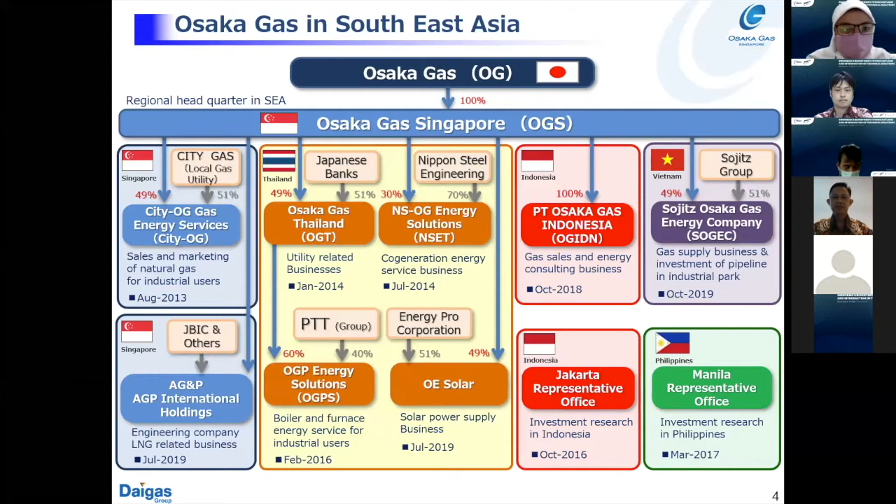This is our organization structure in Southeast Asia. Osaka Gas Group's downstream business has been expanded through leveraging its expertise accumulated in the Japanese market, energy service and engineering business using natural gas based on its own energy conservation technology to reduce CO2 emission and contribute to regional development here. So, Osaka Gas Singapore was established as a regional headquarters for the region in 2013.

And under Osaka Gas Singapore, now we have 8 subsidiaries in 4 countries: Singapore, Thailand, Indonesia, and Vietnam. Also, we have a representative office in Indonesia and the Philippines. Basically, we are collaborating with significant players in each country. For example, we have the JV with City Gas in Singapore and the JV with PTT in Thailand for gas retail and energy service respectively. In Indonesia, PT Osaka Gas Indonesia is collaborating with Pertamina Group since 2018. In Vietnam, we are supplying gas in industrial parks with Sojitz, which is a Japanese major trading company.

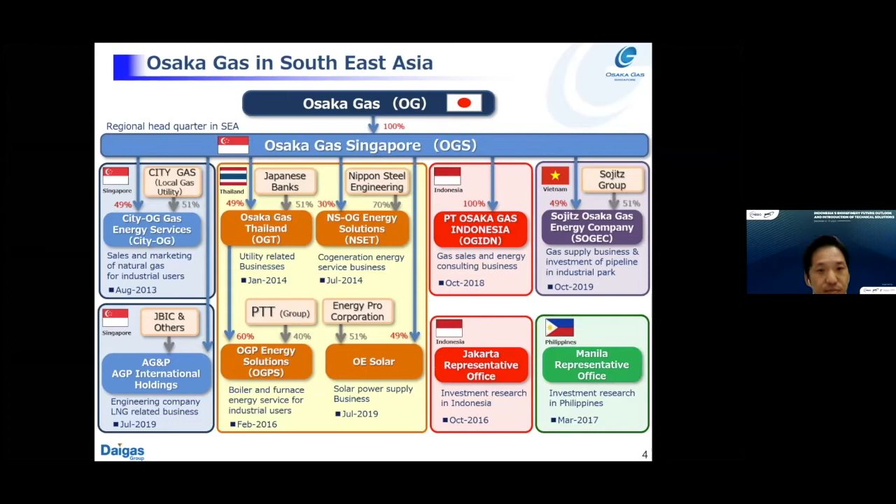And recently, we focus on renewable energy in Southeast Asia. So we established OE Solar in Thailand to conduct solar power business. These are our energy consulting lineup in downstream business. Our wide range of capabilities related to energy are cultivated by our activities in Japan for over 100 years. We have rich experience regarding energy supply, such as liquefied natural gas, LNG, and compressed natural gas, CNG, and so on. And we also have engineering know-how or technology about gas equipment, including boilers, burners, furnaces, and gas cogeneration systems, which are highly efficient in producing heat and electricity by utilizing the exhaust heat of the system.

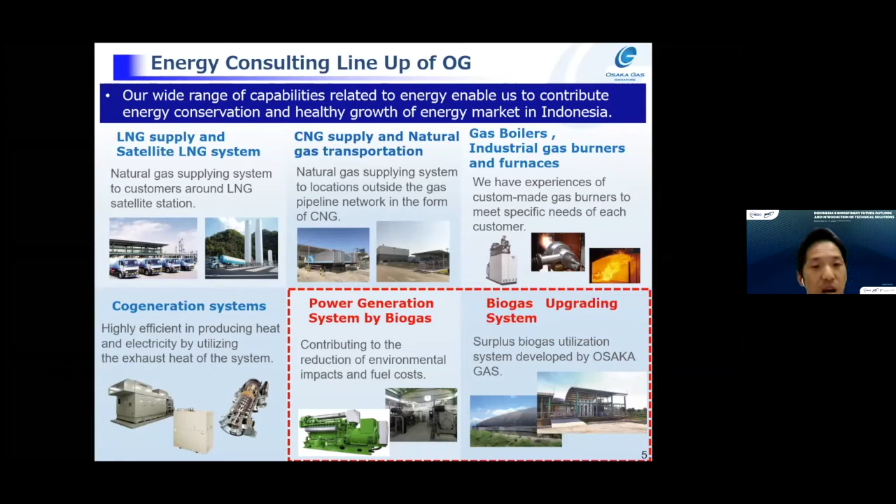Our strengths related to the biogas utilization technology, which I am going to talk about this time, are also an important factor to save energy and reduce CO2 emissions. These capabilities enable us to contribute to energy conservation and healthy growth of the Indonesian energy market, I think. Moving on to the next part of my presentation, I'd like to explain our technology background of biogas upgrading.

Biogas is generated from various raw materials, such as organic waste, sewage, and landfill. I think everyone here knows well, biogas from organic waste consists of about 60% CH4, methane, and 40% CO2, and some small impurities such as H2S. Conventionally, biogas is often released to the atmosphere or burned at the place where it is generated. Even if it is used after removal of minor components, it is used as heat or electricity at the place where it is generated.

However, by upgrading it, it becomes biomethane and can be used for various purposes, therefore expanding the possibilities. For example, by compressing upgraded gas into CBG, compressed biogas, it is possible to sell it as CNG to industries and natural gas vehicles. The upgraded gas can also be used as pipeline gas by injecting it into a gas pipeline. As a gas company, injecting biogas into the gas pipeline is an important factor in supporting the spread of renewable energy in the gas business. And we believe that biogas is one of the best renewable energies for a gas company because we can use the existing infrastructure and engineering capability of natural gas.

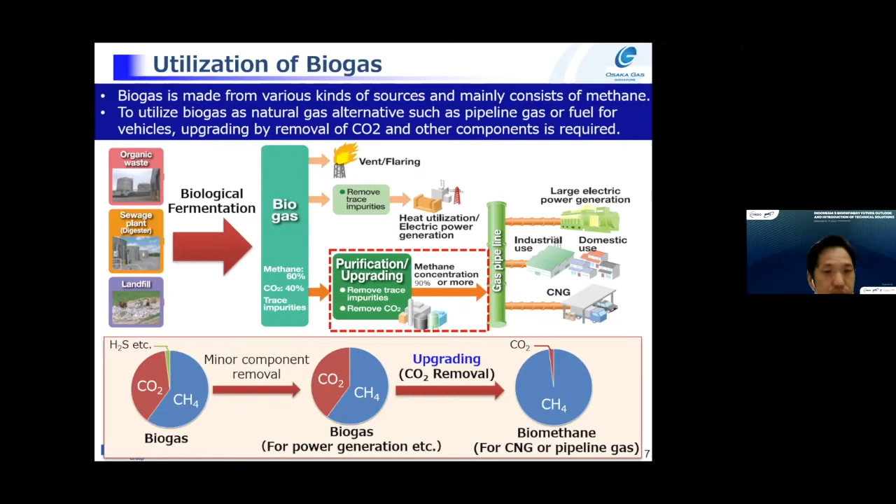Basically, PSA plays a role of making highly purified biomethane, and the separation membrane contributes to realizing a higher methane recovery rate by off-gas recycling. This hybrid system has achieved the world's highest level of methane recovery efficiency of 99% or more, and lower biomethane production cost. In addition, our technology was granted 3 patents.

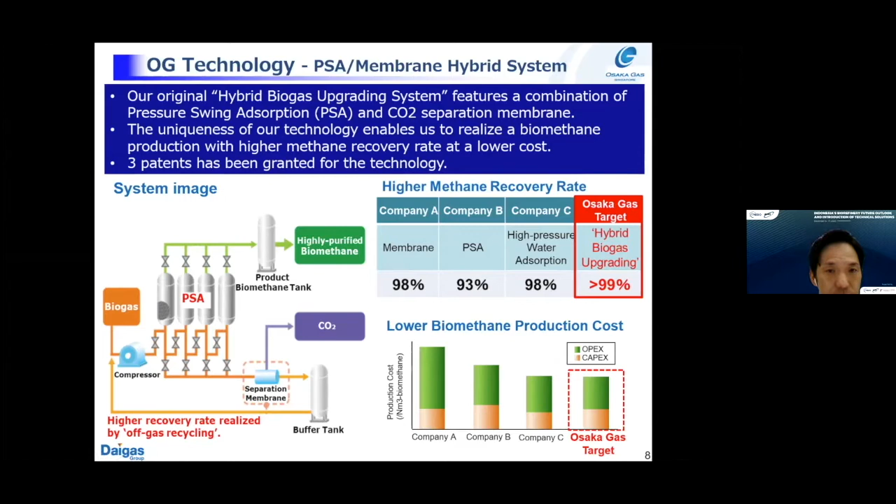I'd like to explain more detail about each technology of the hybrid biogas upgrading system. On the left side, in PSA, CO2 is adsorbed on adsorbent, such as carbon molecular sieves, supplied by our group. PSA has 2 processes, adsorption and desorption. At the adsorption process, only CO2 is captured from the biogas on the adsorbent at pressured condition, so CO2 is removed and high purity CH4 is recovered.

At the desorption process, the captured CO2 is released at low pressure condition and discharged as off gas. But as some CH4 remains in the gaps in the adsorbent, this CH4 is also discharged and cannot be recovered. So the CH4 recovery rate is not so high.

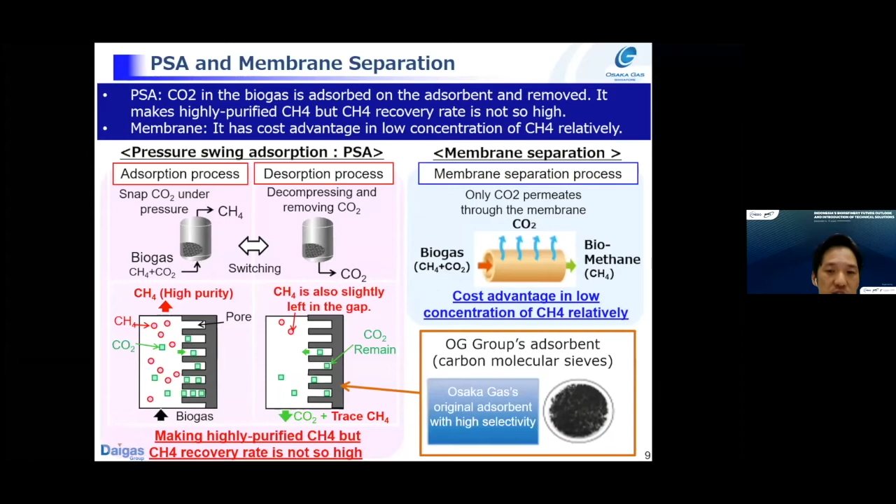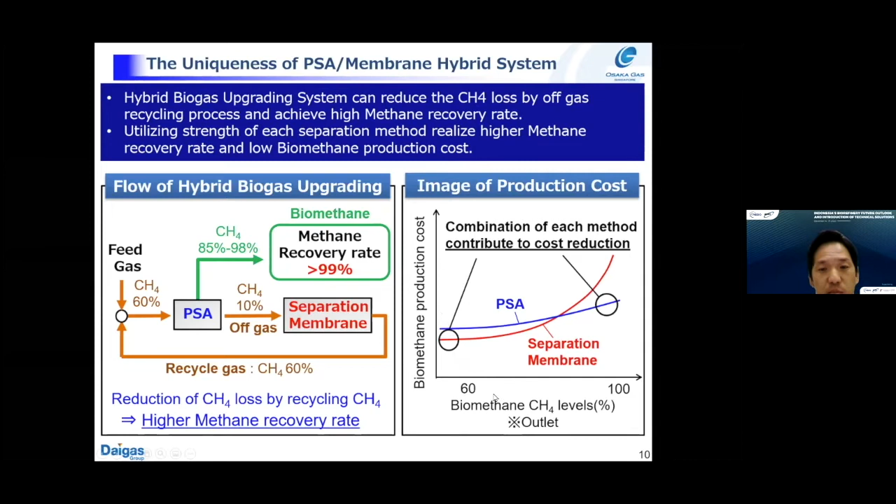The company was actively pursuing the effective use of energy derived from its palm oil mill effluent, called POME, through initiatives such as selling biogas-generated electricity to local power companies. So biogas from POME was already used at this site. Generated electricity was sold through the grid, but due to restriction on grid capacity, not all generated biogas could be consumed. The project was started with a policy of purifying surplus biogas and using it as compressed biogas (CBG) for natural gas vehicles.

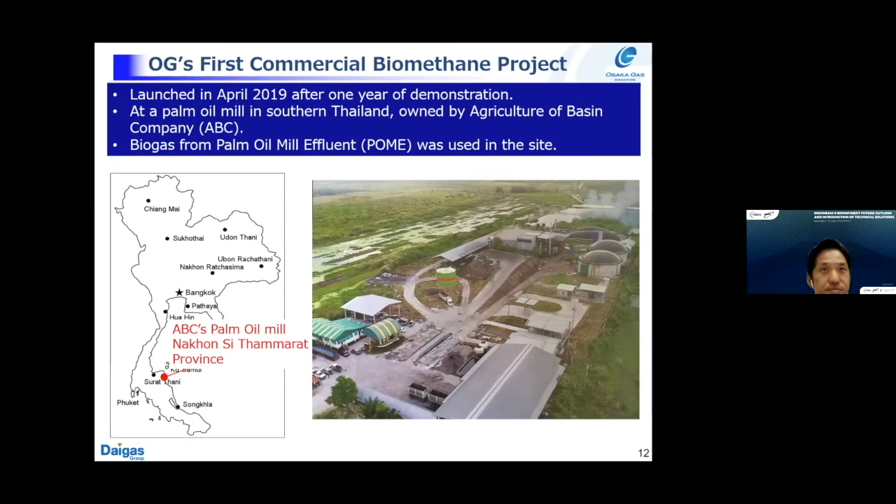ABC uses upgraded biomethane gas as fuel for its own trucks and third-party natural gas vehicles. So the energy station was newly constructed by ABC. 160 cubic meters of biomethane is sent to this station and processed into compressed biogas to be utilized as vehicle fuel for NGV. This is an overview.

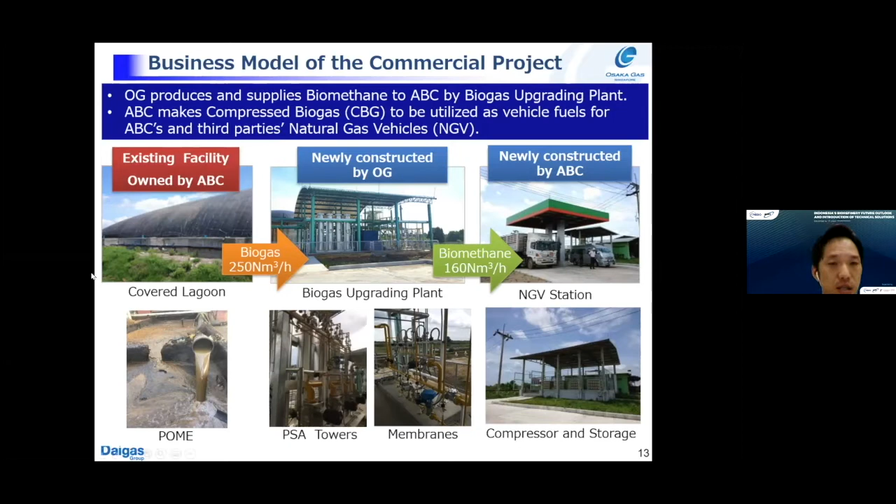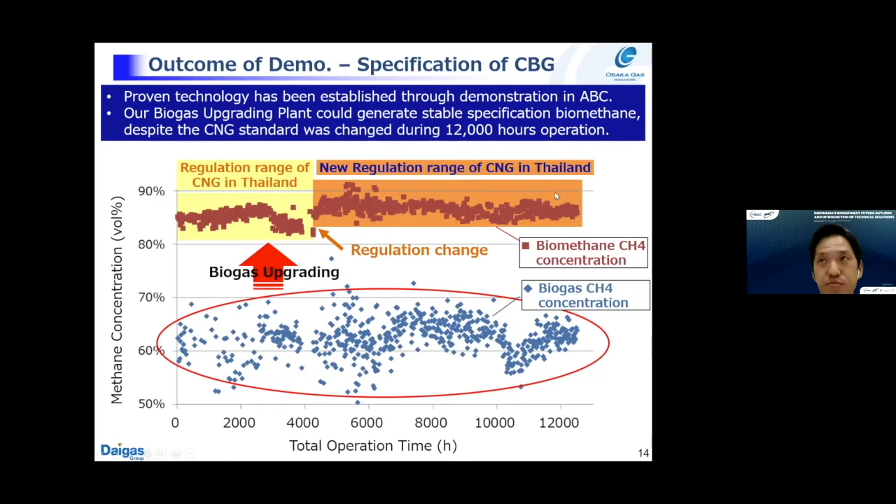Osaka Gas tested to operate a 250 cubic meter per hour biogas refining facility that assumes a commercial deployment. The project focused on verification of long-time based stable operation and a method to minimize the cost of producing methane gas, as well as determine the effectiveness of the methane produced as a vehicle fuel.

Based on the outcome of pilot testing, ABC actively continues developing initiatives to effectively utilize the biogas generated at a factory as a fuel for natural gas vehicles.

Biogas is used at 1 million cubic meters per year, which reduces CO2 emissions by about 1,180 tons per year. The project produced about 95,000 USD per year profit by selling CBG for NGV. We have done the demonstration in ABC successfully, and now we are in the commercial phase.

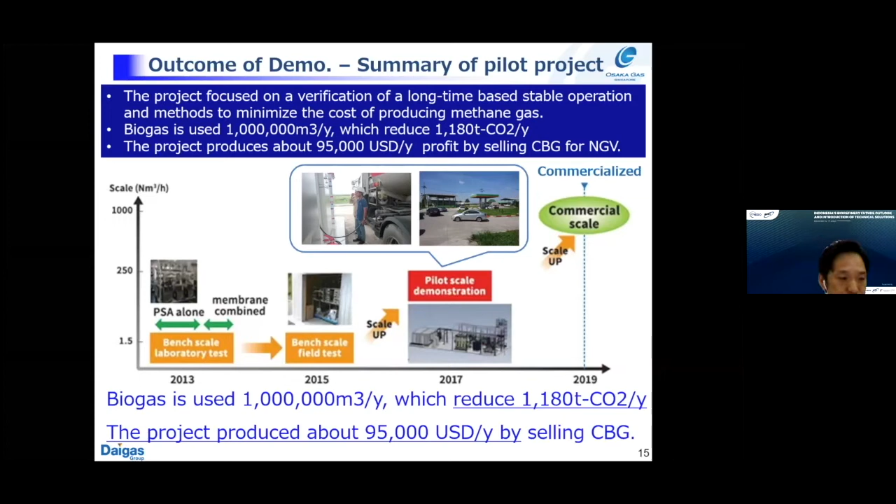Moving on to the next part of my presentation, I'd like to introduce you to our business in Indonesia. We have established PT Osaka Gas Indonesia in 2018 as our business entity in Indonesia.

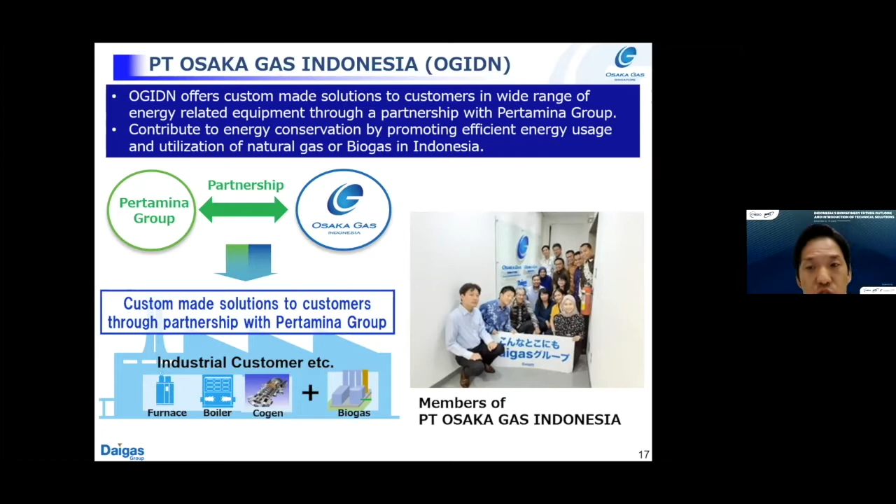With a strong and growing partnership with Pertamina Group, the company offers a custom-made solution to customers for an optimized energy supply and consumption in the country. Our mission is to contribute to energy conservation and environmental footprint reduction in Indonesia by promoting efficient energy usage through utilization of natural gas or biogas in Indonesia.

We manage everything from designing, engineering, and until maintenance of the facility. And such facility is owned by us. Therefore, what the customer needs to do is simply pay a monthly fee to Osaka Gas, which corresponds to energy usage of every month.

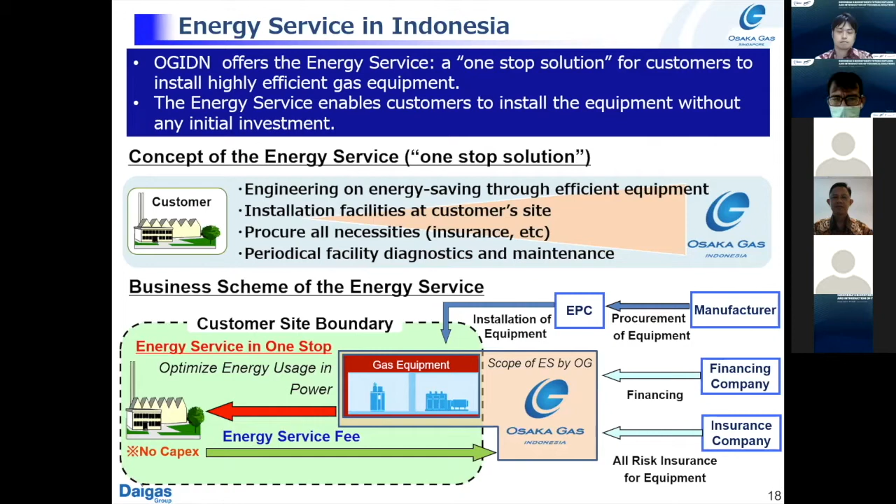In this example, customers supply POME or livestock waste to their biogas facilities, including digester, and receive upgraded biomethane cheaply from our one-stop biogas service. Customers have several options of utilizing biomethane, such as self-consumption, selling to other factories, and injecting into a gas pipeline.

However, I think it is difficult for the Indonesian gas market to inject biogas into a gas pipeline so far, but injection into a gas pipeline will lead to more efficient utilization of biogas.

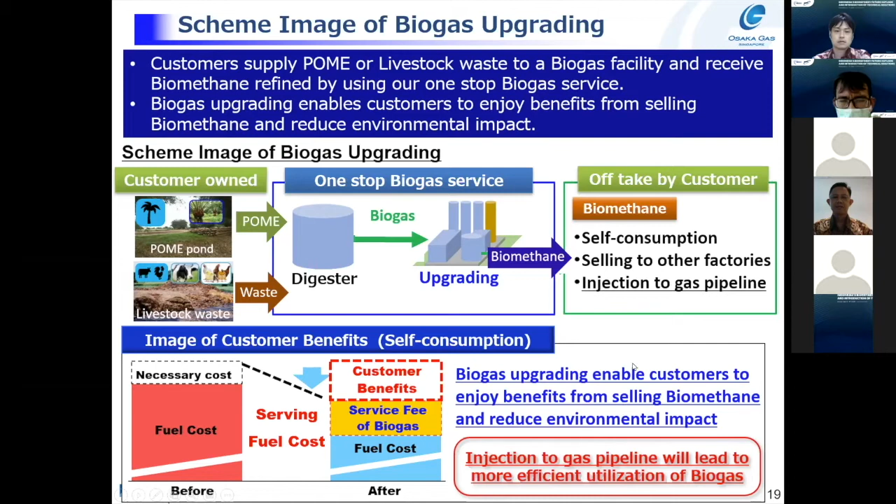Before it is injected into a gas pipeline, biogas needs to be adjusted to the purification level and calorific value equivalent to that of city gas. After such treatment, biogas can be injected into a gas pipeline and supplied to general consumers.

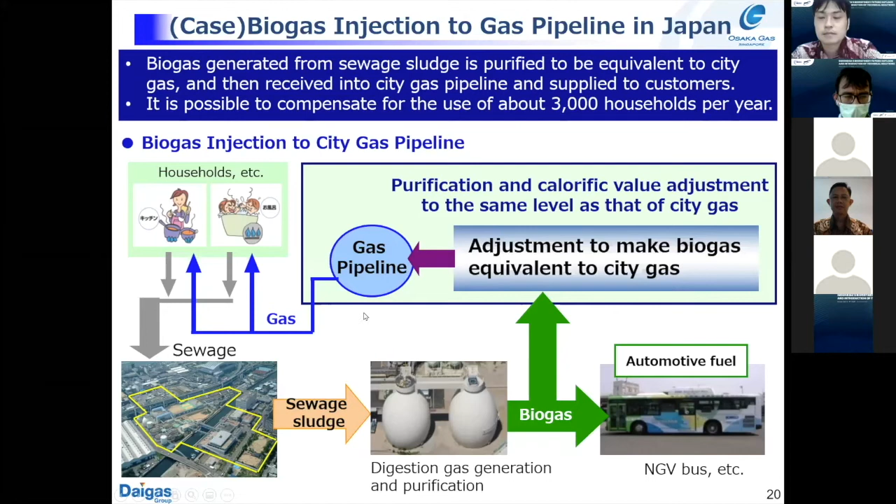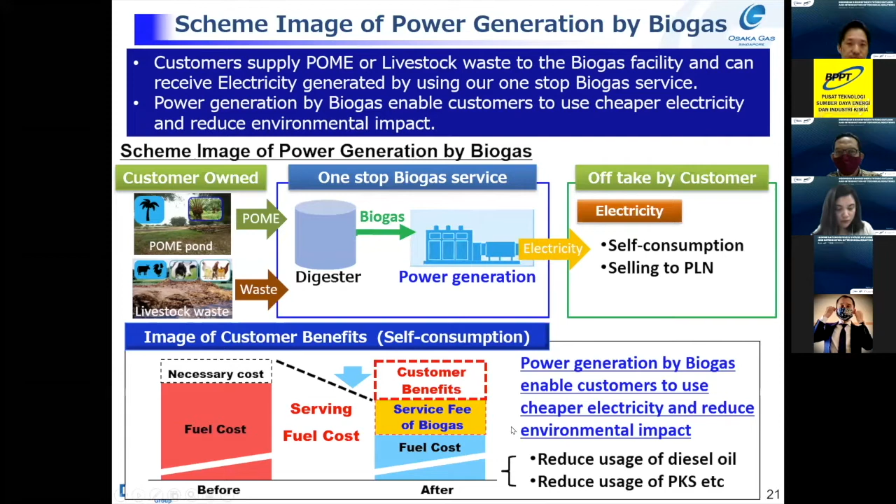In conclusion, I'd like to say that our technology and solution can maximize your benefit and profit in your business. If you are interested in our technology or proposal regarding energy, please contact us individually. Thank you for your attention.

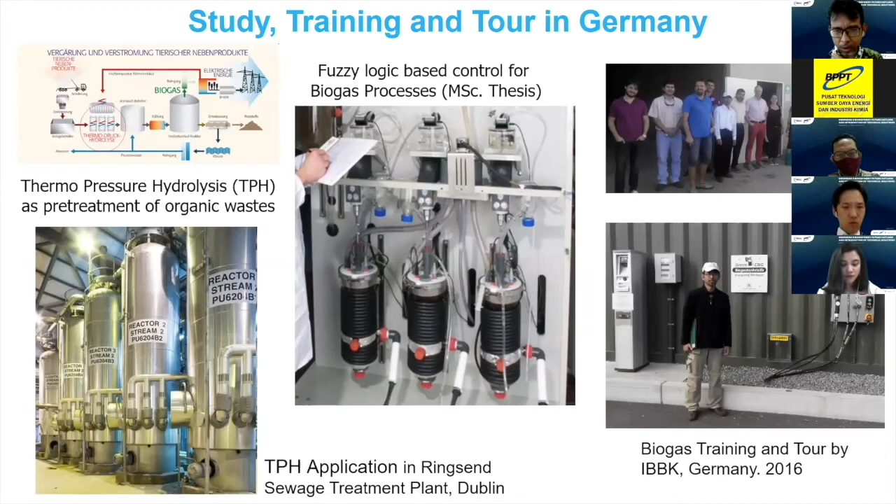I've studied in Germany, diploma and master thesis about biogas technology from organic waste, and I've also joined training and tour in 2016. I am active also in Asia Pacific Biogas Alliance, mostly from Malaysia, Thailand, Philippines, Indonesia, and also from some other countries like, for example, China and Vietnam.

That is our activity. I'm chairman of Indonesian Biogas Association. We have done a lot of activities, meeting with, for example, EuroCham business group, European business group in Indonesia, where we discussed the opportunity and what we can do to push more the biogas technology implementation in Indonesia. We also do many seminars and business forums. For example, last year we did a seminar on business prospect of biogas technology in Indonesia, and also a business forum on biogas upgrading and bio-CNG application.

This year, January 2020, before lockdown, we also did a lot of lobbying and helped the government draft new regulation on renewable energy, together with other renewable energy associations. That is our association. We would like to do technology transfer, capacity building, research and innovation, and we help the government in policy and regulation, networking, matchmaking, fundraising, and so on.

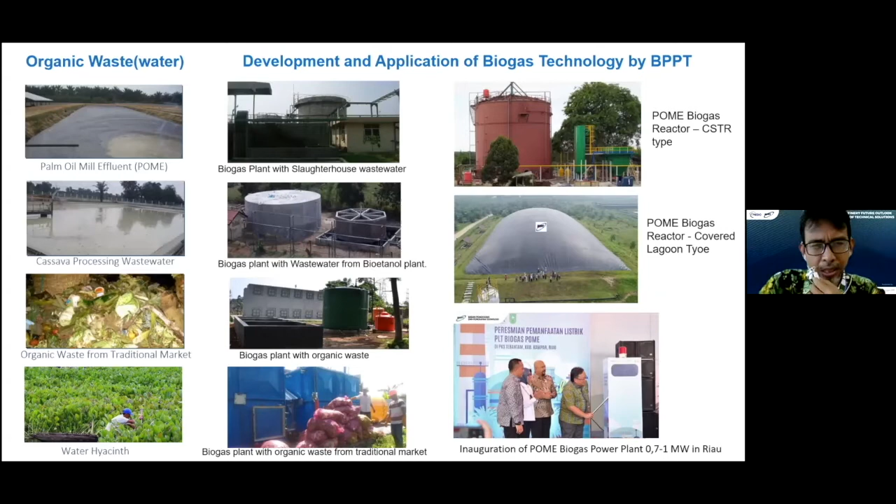As introduction, I would like to show you part of BPPT's activities and experience portfolio in biogas plants, which I was also involved in. The first is the biogas plant from slaughterhouse wastewater, then biogas plant from wastewater from a bioethanol plant, and also from organic waste, still in research and development phase.

This is from the Center for Technology for Energy Resource and Chemical Industry, with Pak Sumbogo, Pak Hans, and so on here. This is a biogas plant from POME, palm oil mill effluent, used first for electricity production for power generation, already used in cooperation with the state-owned plantation company PTPN 5 in Riau, Sumatra.

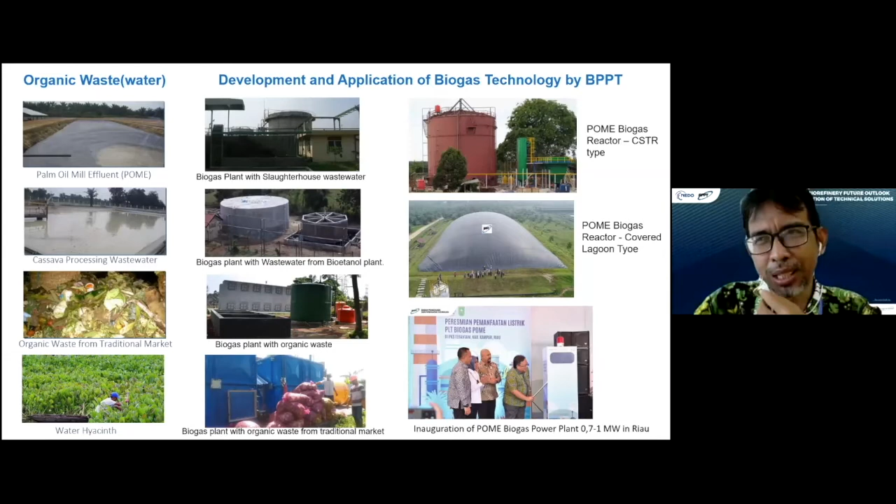And this is another biogas plant, a covered lagoon type, and this is a tank reactor type. We use it for co-firing, and we can save palm kernel shell, which we can sell to, for example, power generation companies. That is our research and small-scale implementation of biogas technology.

We also utilize organic waste in Lombok. Lombok is a separate island, not part of, but close to Bali. We are still in development phase. We would like in the future to have a biogas plant of big size to treat organic waste as well.

Let me explain the biogas potential in Indonesia. First of all, this is the POME biogas. We have in Indonesia about 900 palm oil mills, mostly in Riau and North Sumatra, but also in Kalimantan, part of Sulawesi, and nowadays in Papua also. In our calculation or estimation from the association and also from the Directorate of Bioenergy, Ministry for Energy and Mineral Resources, out of about 900 palm oil mills, only about 10% already have biogas plants. That means the potential of biogas technology in Indonesia is still huge, still high.

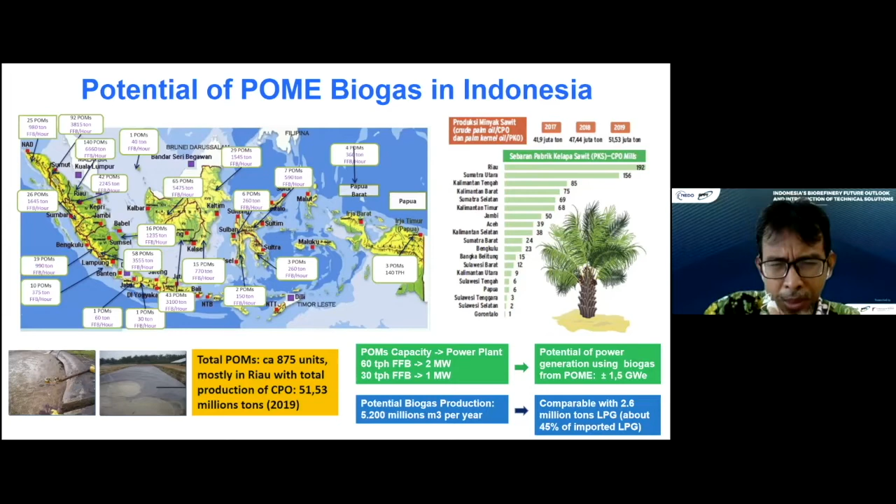There's another potential for feedstock of biogas beside the palm oil mill effluent. As I said before, we have also cassava processing industry, approximately hundreds of them.

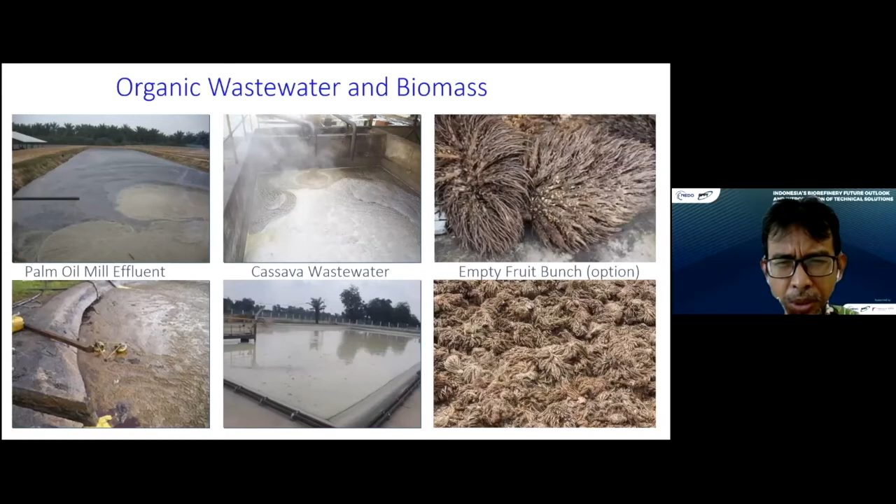We can use it also for biogas production. At the same time, we treat the wastewater to avoid the environmental impact of it. And theoretically, we can also use the solid organic waste for biogas production, but we have to do some pre-treatment.

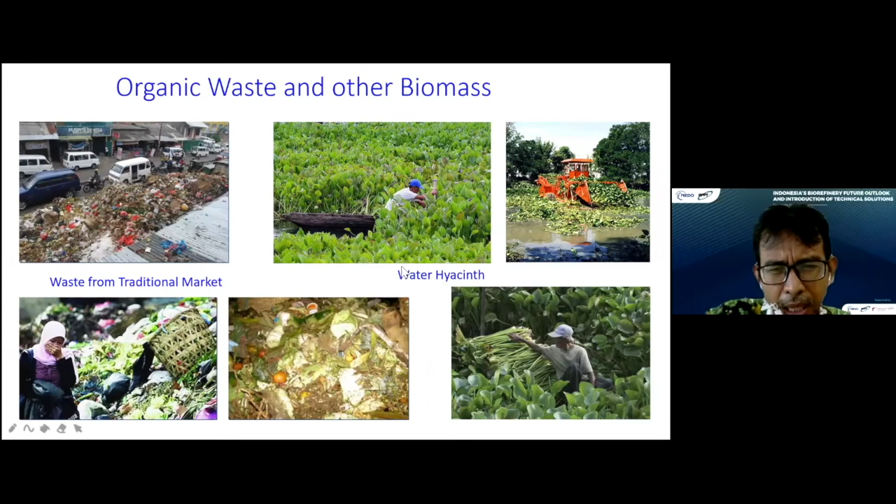We have also other organic waste and other biomass. We can treat it to convert it to biogas, for example, organic waste from traditional markets, from municipal, from restaurants, from other sources, and also other biomass such as water hyacinth and so on.

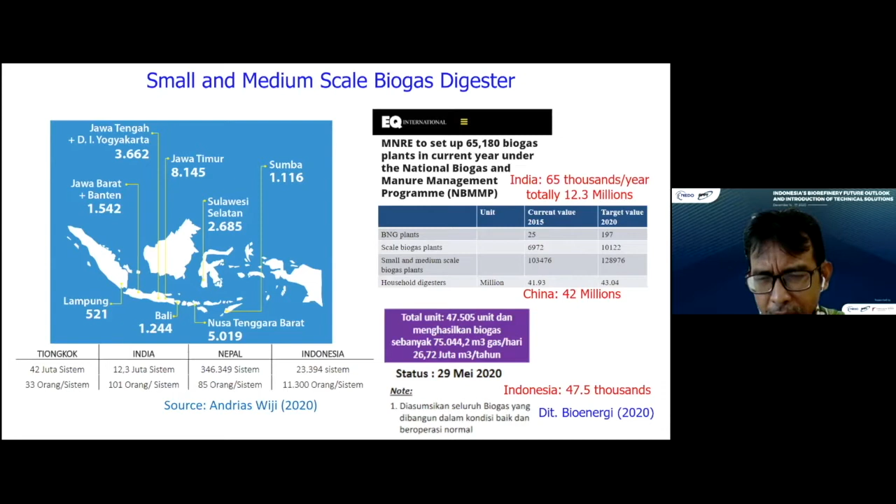I would like to also present small and medium scale biogas plants, which also exist in Indonesia. Compared with other countries, we are still behind. For example, so far we have about 47.5 thousand so far.

But if we see India, that is just in one year, 65,000 per year. That is a big number. And 1,000 times of Indonesia, China, 42 million biogas digesters already exist there. Still a lot of work, or still potential, in Indonesia.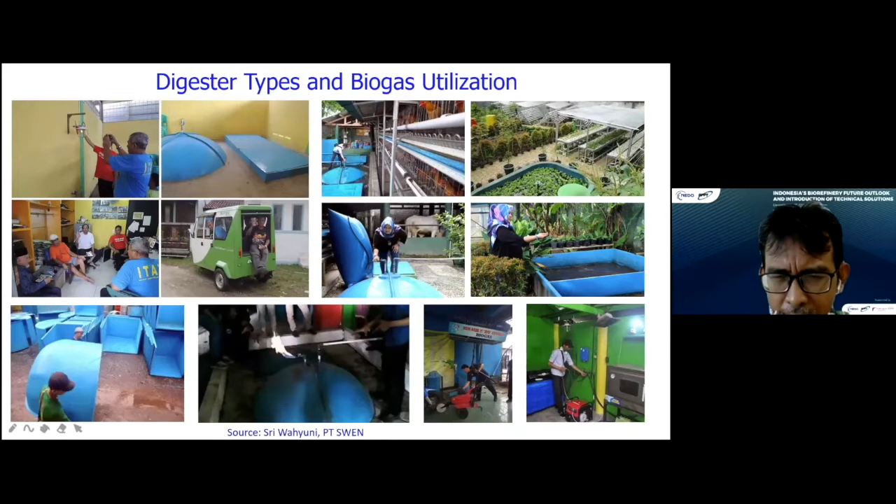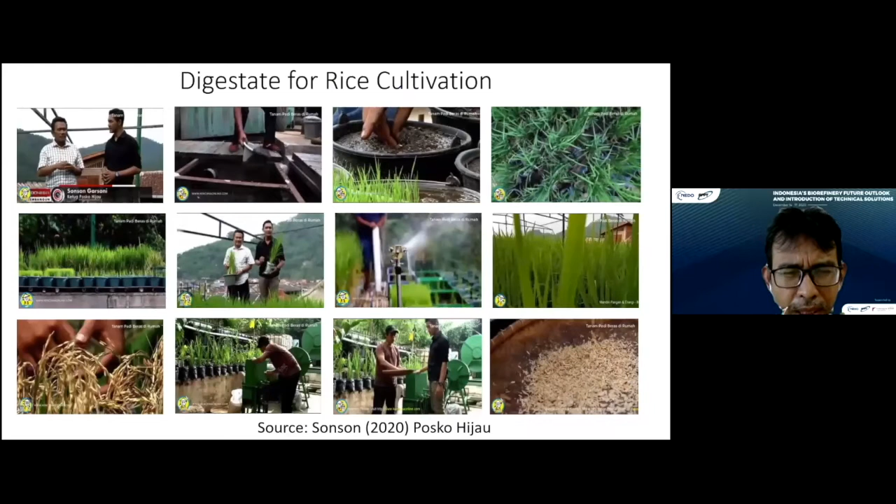There's other types of small scale digester, and there's also some implementation of utilization of digestate for agriculture, for rice cultivation, and so on. And this is what I explained before, biogas from organic waste, and we use the digestate as compost.

Industrial scale biogas plant in Indonesia, I explained to you before, that is built by BPPT in cooperation with the state-owned plantation company PTPN 5 in Riau, and it is a good example, I think, and it's operated for power generation, and the electricity is used by PTPN 5.

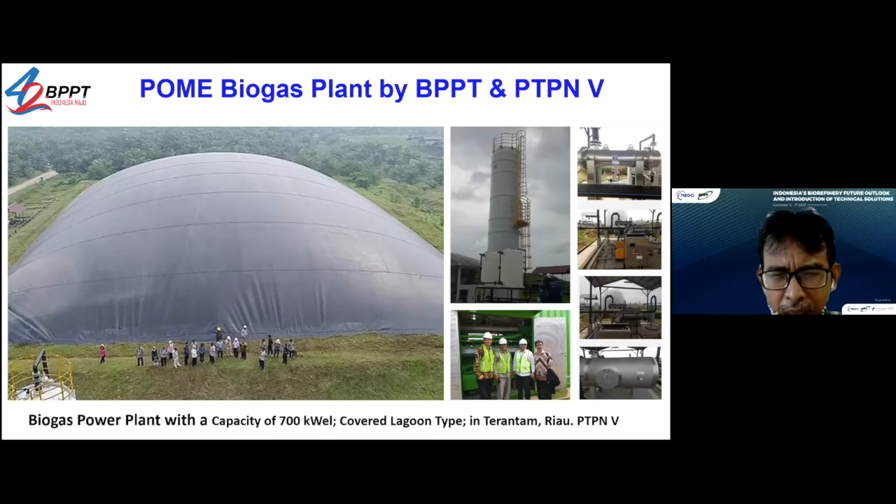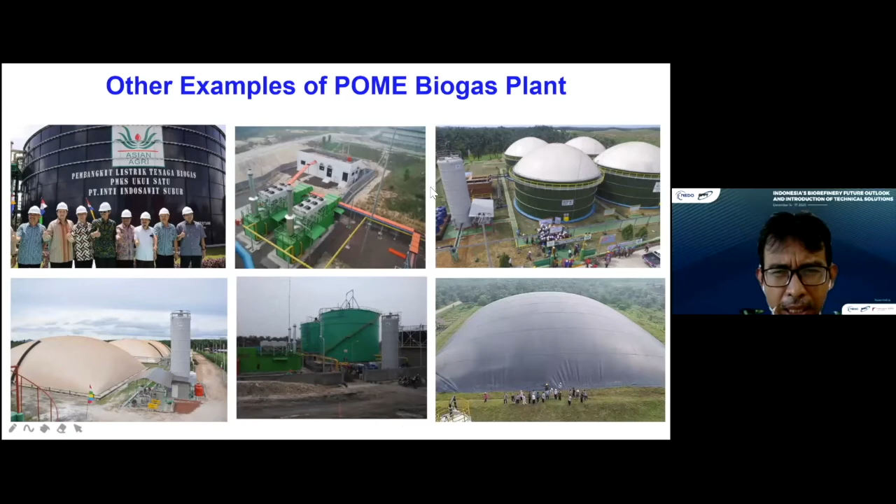Another example, just some examples of POME biogas plants. Commonly, there's two types of biogas reactor: covered lagoon type, left and right side, and the other are tank reactor types.

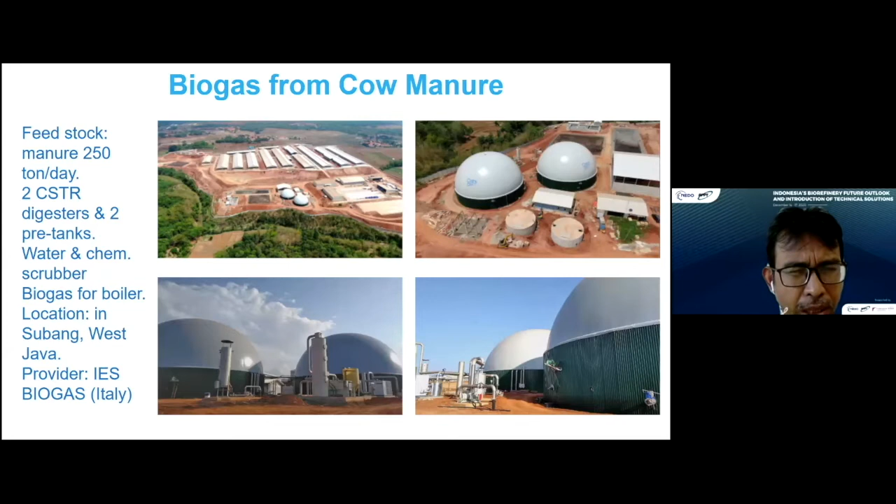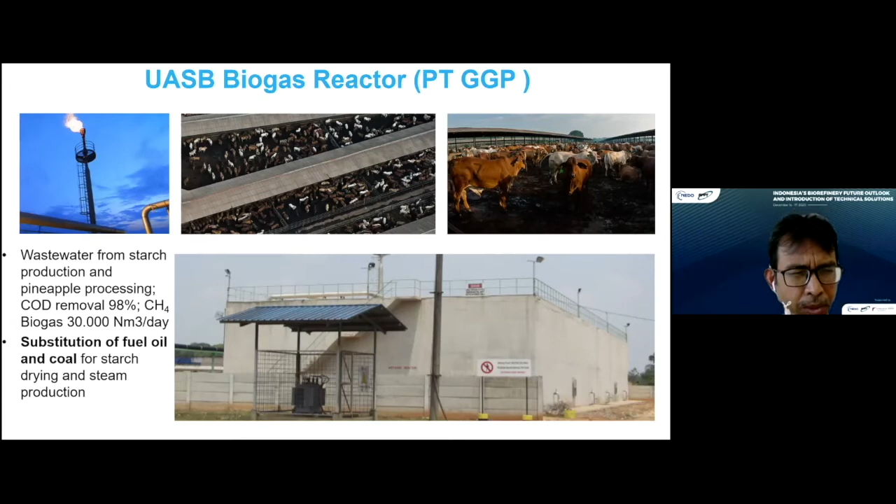And that is another example, a biogas plant utilizing cow manure, in Subang, West Java, about 150 kilometers from Jakarta. And that is a UASB type biogas reactor, from wastewater from starch production and pineapple processing. And they use the biogas to substitute fuel oil or coal or gas, for example for starch drying and steam production for their production line.

And that is a new step, a new era in Indonesia, utilization of biogas not only for power generation but also for bio-CNG, as Mr. Fukuda explained before. That is the first plant in Indonesia, in East Borneo, East Kalimantan.

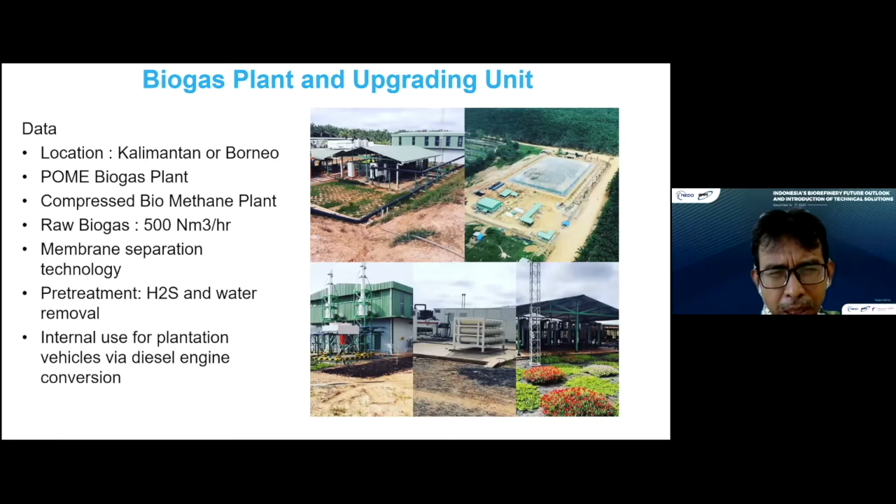About 500 cubic meters per hour of biogas, and they use it for plantation vehicles, for trucks and so on. And they do also bottling and send it to existing gas power generation. And we hope the baby is born. We hope that in the near future there will be a baby boom in this business.

And future research and development, as I mentioned before, actually we can also use other solid organic waste as co-digestion to increase the biogas production and also the stability of the biogas production.

And as I mentioned before, there's already implemented biogas utilization for power generation, and also co-firing in boilers, so we can save the shell or biomass, and we can sell the shell to others, for example, for co-firing in power generation to reduce the use of coal.

And biogas upgrading, I think that is a good option for the near future, hopefully. And the next topic is, I think, solid and liquid fertilizer utilization from the digestate.

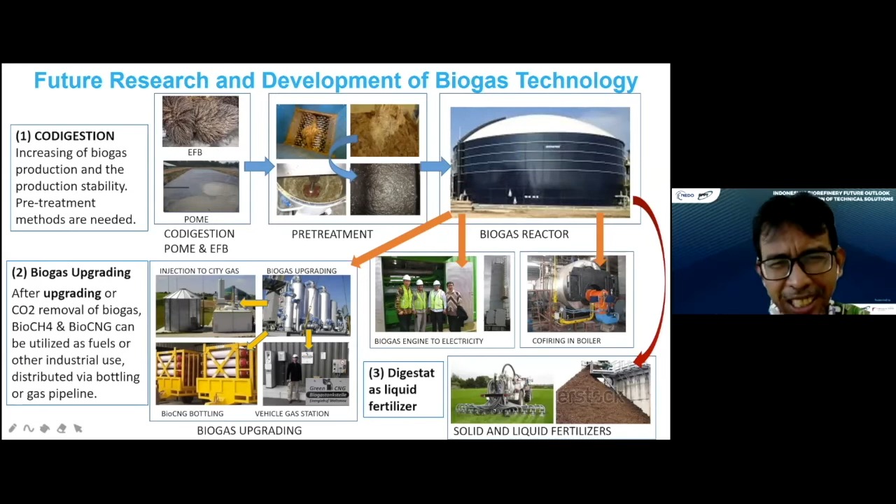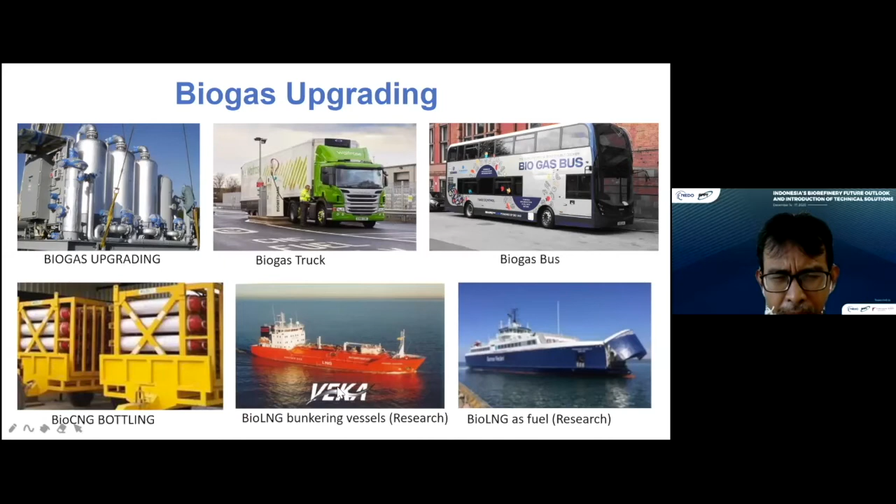Just our dream, to show you what is in Europe, also maybe in Japan and so on. Biogas is utilized for truck and bus fuel, and also bottling of bio-CNG. And the new research, I think, is bio-LNG as bunkering and also as fuel for ships.

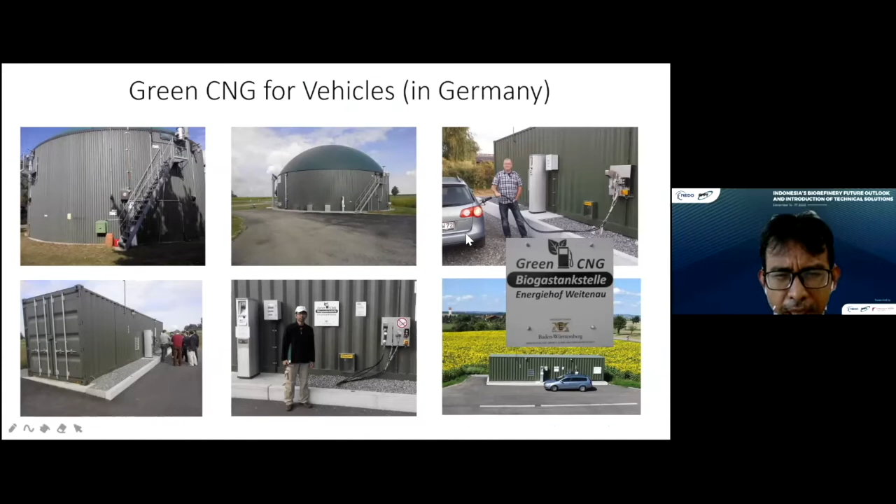That is some picture from our visit in Germany in 2016. I visited the gas station for gas vehicles, and also biomethane injection to gas pipelines. That is a common practice in Europe and other countries.

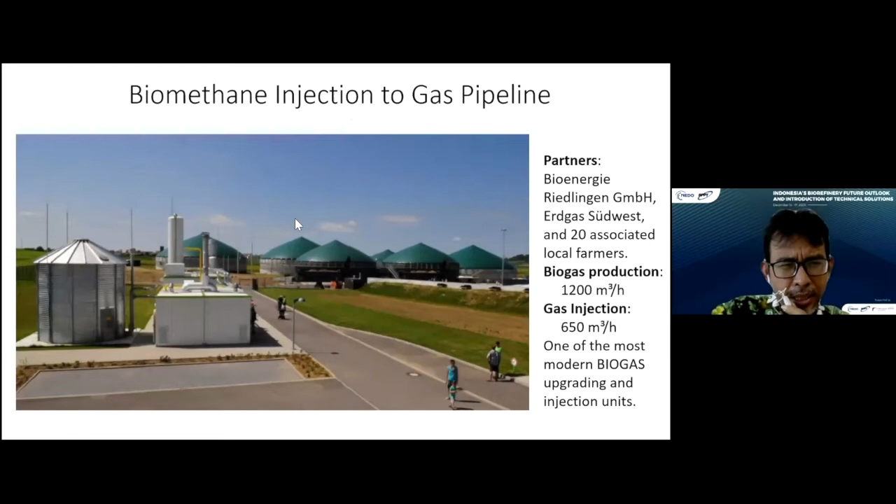Yes, it's just existing infrastructure we can utilize. If we have bio-CNG in enough amount, we can also theoretically use the existing infrastructure: existing natural gas stations, existing gas vehicles, existing gas distribution via bottling, and also existing gas pipelines.

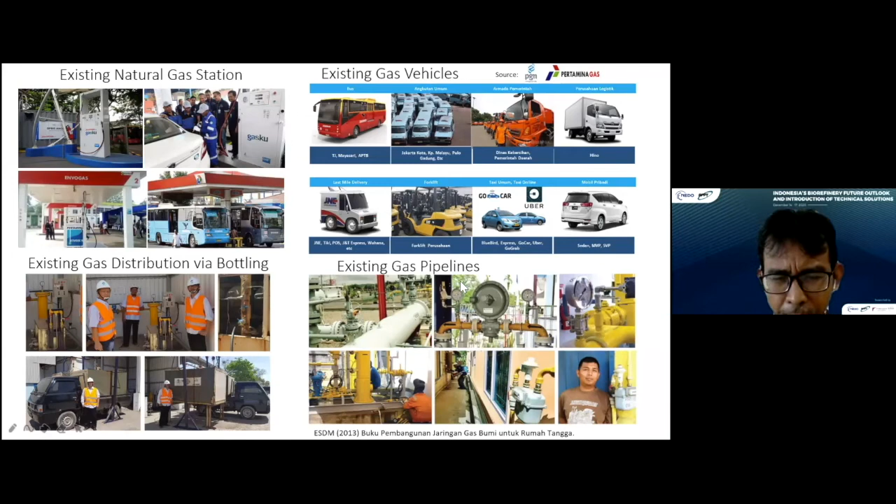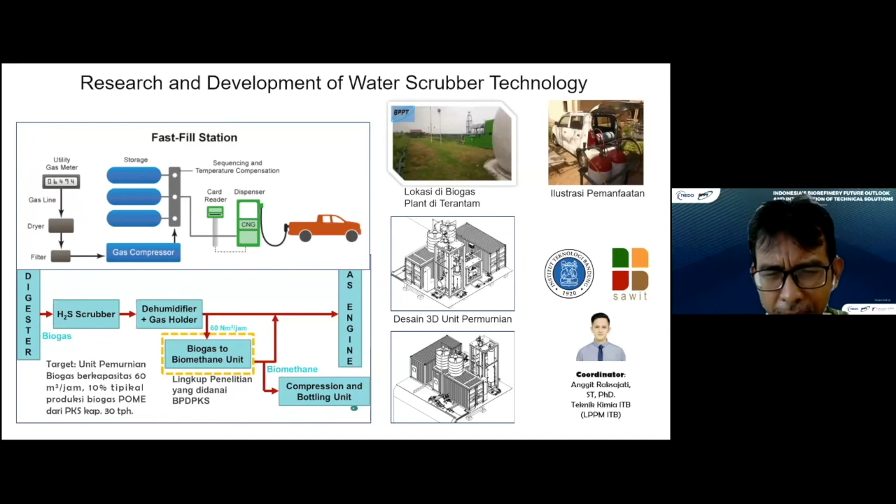That is just to show you some activities in this direction. The research and development of water scrubber technology for biogas upgrading, still an ongoing project together with our partner from ITB. And that is funded by the palm fund. This is also research funded by BPDP Sawit.

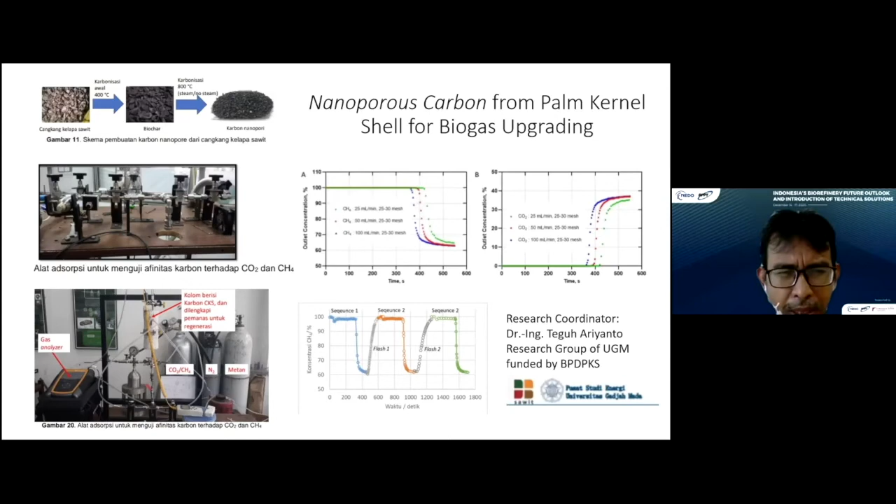It is by the research group from chemical engineering of UGM in Jogja, and the topic is nanoporous carbon from palm kernel shell, not only for biogas upgrading, but this is good data they can use theoretically for biogas upgrading. And lastly, I would like to show you the potential of biogas technology to treat municipal organic waste.

The good thing is that we treat the municipal organic waste, which is about 50 to 60% of the total solid waste from the city, mostly. And if we can produce biogas from this waste, the location is not far from the city. We can then use it as BioCNG after biogas upgrading, for restaurants, for industry, for gas vehicles, and so on, which is not so far from the city.

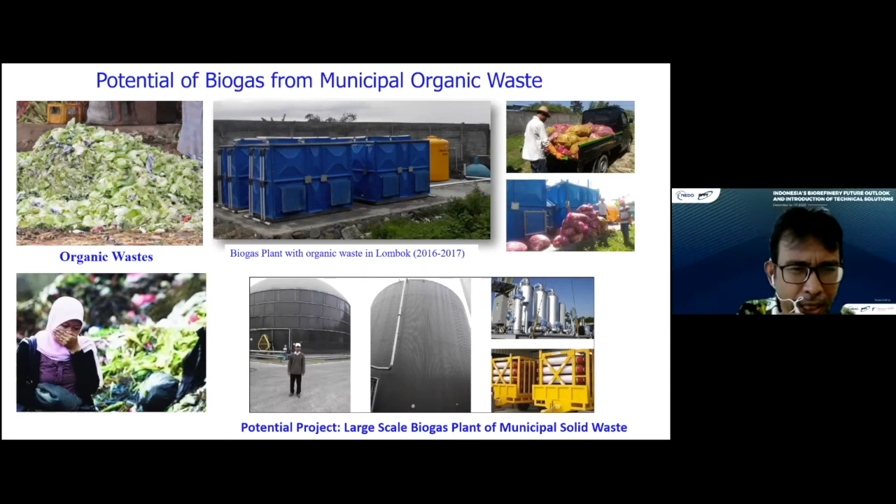Okay, thank you very much, Pak Mark. It's a very nice presentation, giving very clear examples of biogas activity, the small and medium scale biogas plants in Indonesia, the digestate for rice cultivation, and up to industrial scale biogas plants in Indonesia.